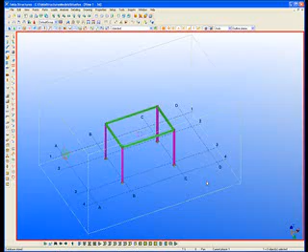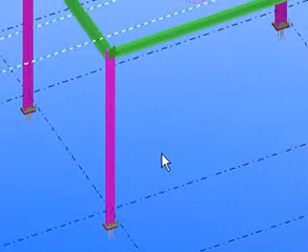Now it's time to clean up a model. Once everything is connected, it's time to explode the connection. By exploding the connection, it means that we are making our component a separate item. Like a plate is a separate item, bolt, weld, cut, everything is a separate item. If it's in the component item, it means everything is a macro. We don't want a macro. The reason why is once we put a number on, if we reapply the macro, it will regenerate the number. So that's the reason why we explode our connection.

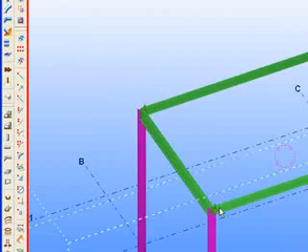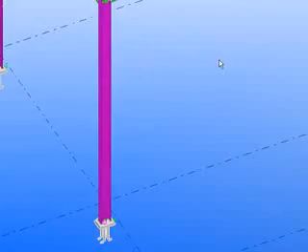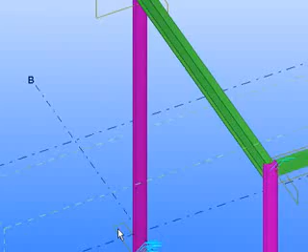Okay, let's explode the connection by going to select all and only select your connection. Highlight the whole model, and everything highlighted is in white. If you zoom in, you see all the components white: anchor rod, grout, shear plate, white. Right click on our mouse, explode the component. Now every piece is a separate item. There you go. And we can see the cut, the weld. Now in the model, the weld is represented by a check mark, the blue check mark there. You can see.

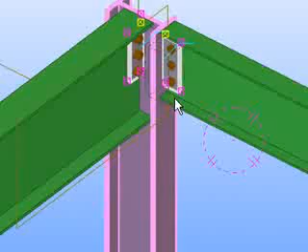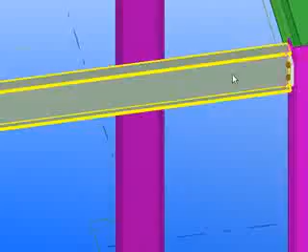Okay, let's take a quick look if everything looks alright. Make sure you go back to select all again and hang on to Alt, highlight your steel, and you can see everything that's attached to it. Two shear plates. Let's go down to our base plate, it's attached, and no anchor rod or grout is attached. Let's check our beam. End plate is attached to the beam. V, pick a point so we can rotate. Zoom in. Nothing there. It's good. Looks good.

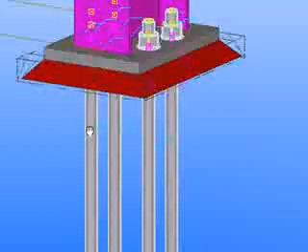Now let's check our anchor rod. Zoom in to one of your anchor rod locations. V to rotate. V and then pick your point, and then you can rotate at that point. Let's see. Hang on to Alt. Uh-oh, it looks like our anchor rods are welded together. We don't want that. We want each anchor rod to be a separate item. It looks like we have 3 welds here. It looks like those 3 welds are the ones welding every single anchor rod together.

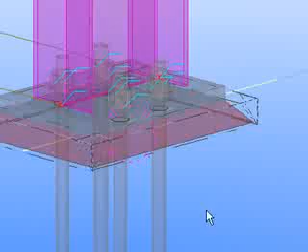Okay, let's see what happens when we remove one of them. Remove. It looks like that works. Yep. So now one anchor rod is only one item here. Let's click on our blue check mark, which is the weld again. Delete. Delete. Hang on to Alt and select your anchor rod there. Everything looks okay. Now if you want to change your view to transparent view, hold Control 2, transparent view. There you go. If you want to go back to the solid view before, Control 4. There you go.

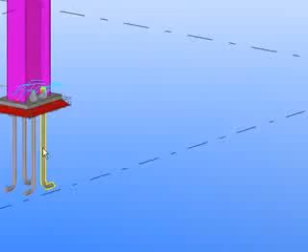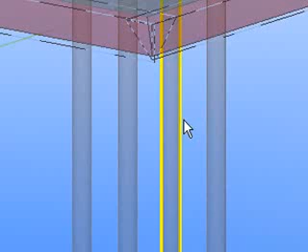Now let's go to each of our anchor rods and delete the welds. There should be only 3 welds that you need to delete. Quick check. Control 2, transparent. Yep. Okay. Go to our last anchor rod location. Delete, delete, delete. Quick check. Alt. Everything looks okay. Zoom out. Control 4. Back to original view.

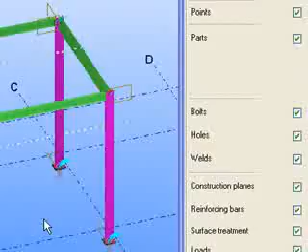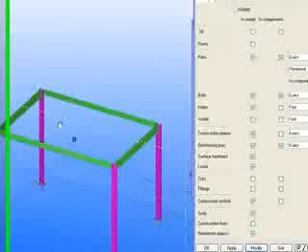Now let's clean up our 3D by double clicking on your background. Go to the display tab here. Click on it, and you will have display advanced settings. I recommend taking some time to play around with what each of them does to the 3D. I'll just do a quick one here. Just remove the cut from our 3D, fitting, construction line, and point, modify. Oh yeah, and the weld. And it will instantly remove everything that we don't want to see in our 3D. There you go. Everything looks good. Modify. Yep. There, we're done checking.

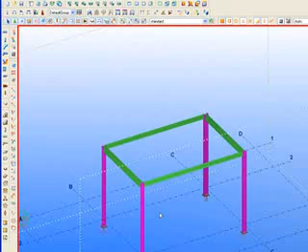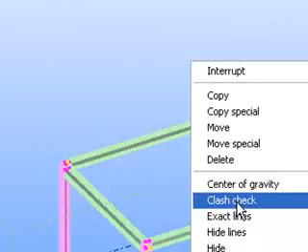Now one last thing we need to do is a clash check on our model here. A clash check means that we want to make sure that our beams are not interfering with each other. To do that, we select all and only select parts. Select all the steel model, right click anywhere, and we move down to clash check. Click on it, and then it will bring up our error report here. Let's make it bigger. It looks like our anchor rod is interfering with the grout, and it's interfering with the base plate too.

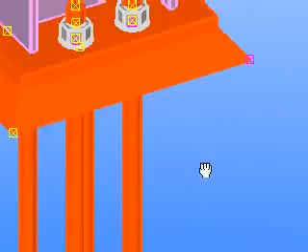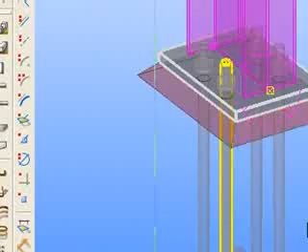Anything in red is a clash. Let me click on it, and if you highlight one of your reports there, it will highlight what is interfering with each other. You can go to Control 2 and check out what's going on. This anchor rod is interfering with the base plate, which is okay. That's just axial. Sometimes it can't read the hole on the base plate. It looks okay because we've got the hole there. Our hole, I think we made it 1 5/16, and our anchor rod is 1 inch. So that looks okay. Let's go to the next one.

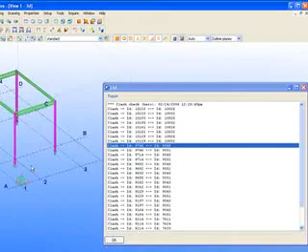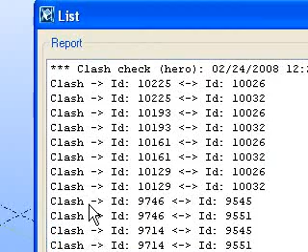Next view looks okay. Now the grout really doesn't matter, because the erector will put the grout right after they embed the anchor rod. Everything looks okay. Let's zoom out a bit and take a quick look, keep going down the list there. It looks like most of our clashing is our anchor rod with the base plate and grout. Take a quick look down the list, and we have no clash with our beam to column connection. Everything looks okay and fits.

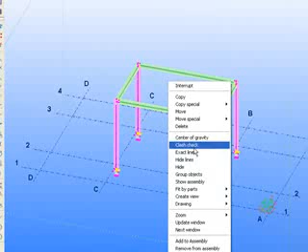Okay, let's close down your clash check. Remember, if you want to do a clash check, select the steel only, highlight the whole steel, right click, clash check. Okay, that's it. Let's do a quick save and we'll continue on in the next lesson.